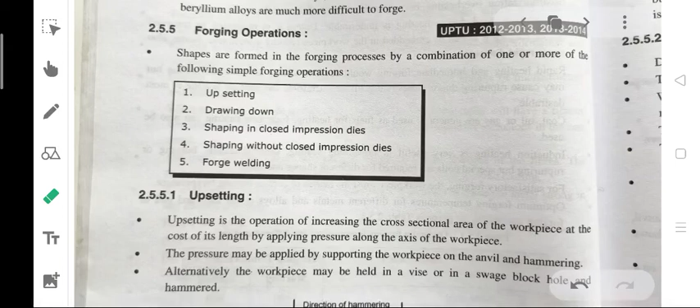In forging operations, there are five forging operations. First is upsetting, second is drawing down, third is shaping in closed impression die, fourth is shaping without closed impression die, and fifth is forge welding. These are the shapes formed by the forging process, by combination of one or more of these simple forging operations.

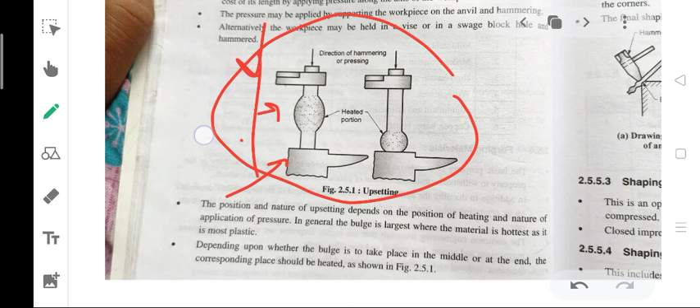Here you can see how the shape of the heated portion is changing. So upsetting operation means: upsetting is the operation of increasing the cross-sectional area of the workpiece at the cost of its length by applying pressure along the axis of the workpiece.

Second, the pressure may be applied by supporting the workpiece on the anvil and hammering. We saw in the diagram the anvil position and hammering position. And third, alternatively the workpiece may be held in a vise or in a swage block hole and hammered. This is also usable.

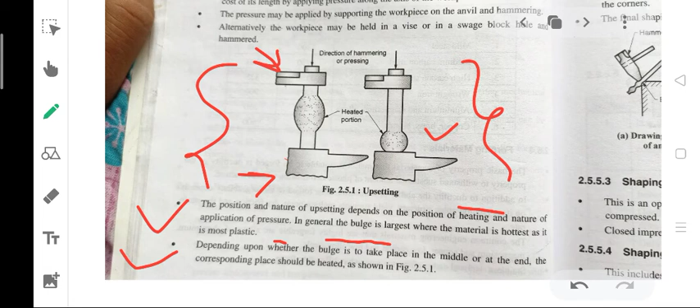In general the bulge is largest where the material is hottest, as it is most plastic by nature, and depending upon whether the bulge is to take place in the middle or at the end, the corresponding place should be heated. As we see in the diagram, the heated portion is here, and its formation is occurring accordingly.

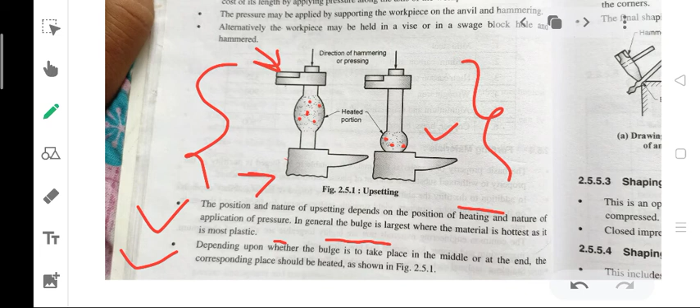Further, it depends upon whether the bulge is to take place in the middle or at the end; the corresponding place should be heated. If a short bar is heated all over and a heavy pressure or blow is applied, it will be upset or bulged over its whole length, and when the pressure or blow applied is light, only the local effect is seen.

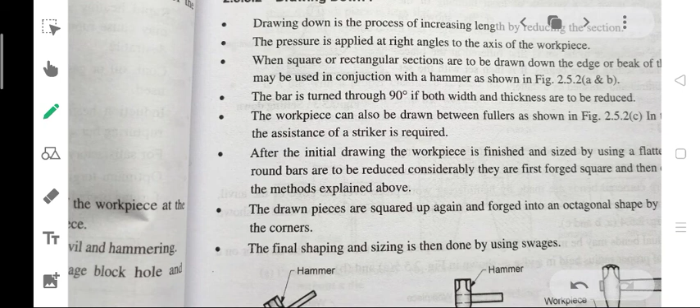Now let's do the next operation, that is drawing down. In drawing down operation, this is the diagram of the position. There, the first diagram is drawing on the edge of anvil. This one is the edge of anvil. This one is drawing on the beak of anvil. Here you can see this is the symbol of plus, that is the beak of anvil.

And this one is the diagram for drawing between the fullers. So this one is the fuller. So what is the drawing operation? Drawing down is the process of increasing the length by reducing the section, and the pressure is applied at right angles to the axis of the workpiece.

Third, when square or rectangular sections are to be drawn down, the edge or beak of the anvil may be used in conjunction with a hammer, as we can see the hammer position here. Also the bar is turned through 90 degrees if both width and thickness are to be reduced. The workpiece can also be drawn between fullers; in this diagram we have seen the fullers, and sized by using a flatter.

Fuller and flatter का यूज़ करते हैं. And when the round bars are to be reduced considerably, they are first forged square and then drawn by the methods explained above, and the drawn pieces are squared up again and forged into an octagonal shape by flattening the corners, and the final shaping and sizing is then done by using swages.

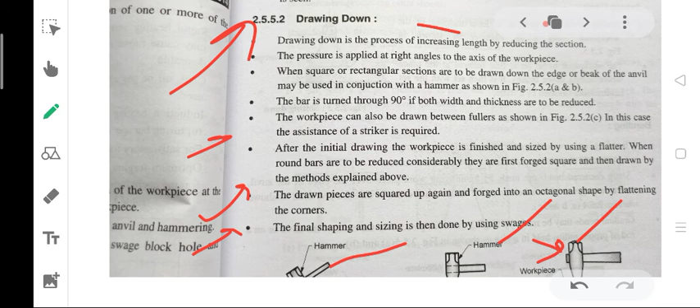ये आपको रिमेंबर होना चाहिए कि फाइनल शेपिंग एंड साइजिंग डन बाय अलग अलग तरीकों से, जो आप यहाँ बीक की पोजीशन में देख सकते हैं. ये हमारे सारे ड्राइंग ऑपरेशन हैं. ड्राइंग फर्स्ट कंडीशन में हम एज ऑफ द एनविल पर कर रहे हैं, सेकेंड ड्राइंग ऑन अ बीक ऑफ एनविल पर।

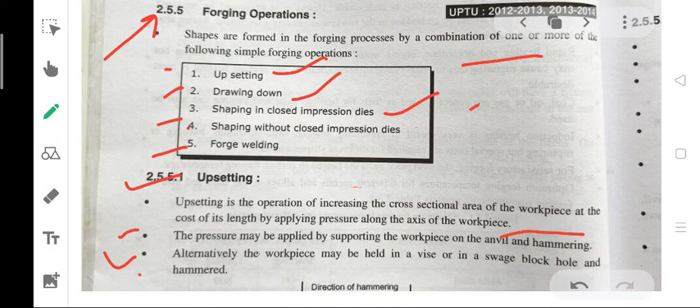एंड थर्ड वन इज द ड्राइंग बिटवीन फुलर्स के थ्रू. नेक्स्ट ऑपरेशन जो हमने नाम पढ़े थे, वो हैं अपसेटिंग, ड्राइंग डाउन, शेपिंग इन अ क्लोज इंप्रेशन डाई, शेपिंग विदाउट क्लोज इंप्रेशन डाई. तो जब हम शेपिंग इन अ क्लोज इंप्रेशन डाई की तरफ प्रोग्रेसिव होते हैं, यहाँ पे आप देखेंगे क्लोज इंप्रेशन डाई एंड विदाउट क्लोज इंप्रेशन डाई.

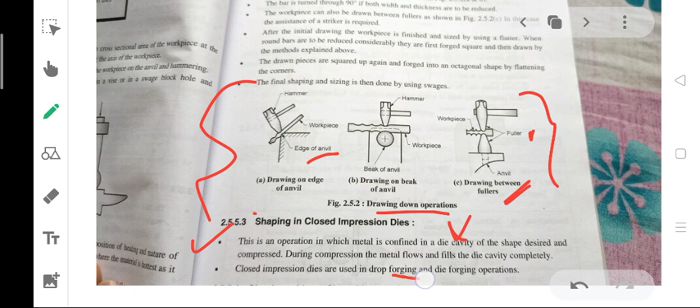दिस इज एन ऑपरेशन इन विच मेटल इज कन्फाइंड इन अ डाई कैविटी. यहाँ पर डाई वर्ड यूज़ हो रहा है, यानि डाई का यूटिलाइजेशन है, एंड इन अ डाई कैविटी ऑफ द शेप डिजायर्ड एंड कंप्रेस्ड. During compression the metal flows and fills the die cavity completely. Closed impression die are used in drop forging and die forging operation, तो closed impression die का यूज़ करते हैं drop forging and die forging operations में.

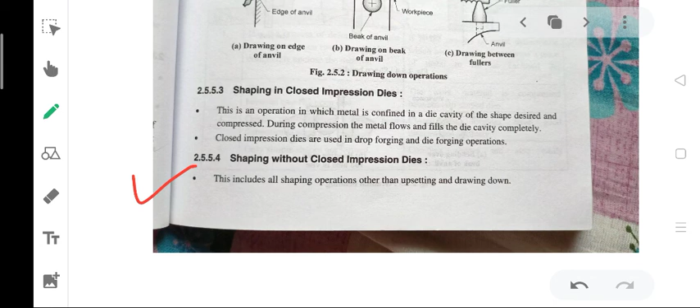And further there is shaping without closed impression die. This includes all the shaping operations other than upsetting and drawing down. The operations included in this category are setting down, bending, flattening, piercing and so on.

तो यहाँ पर आप पहले देखेंगे सेटिंग डाउन ऑपरेशन. इन दिस सेटिंग डाउन ऑपरेशन, दिस इज द अरेंजमेंट - यहाँ पर हैमर ब्लो, हैमर पोजीशन, सेट हैमर, एंड देयर आवर कंडीशन. सेटिंग डाउन इज द प्रोसेस ऑफ लोकल थिनिंग ऑफ द वर्कपीस using a set hammer as shown in figure, and the workpiece is to be set first with fuller at the place where the setting down begins. It is then set with the set hammer and finished by flatter.

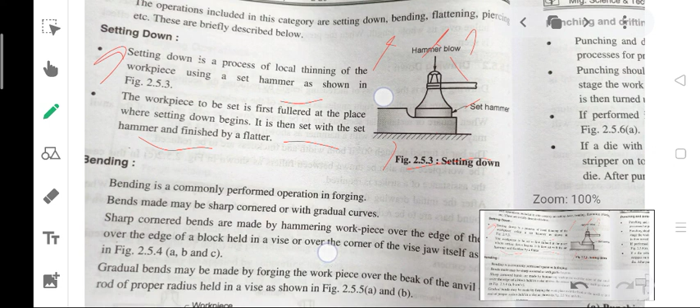इसको हम लोग अभी देखेंगे bending operation. Bending is a very commonly performed operation in forging, and bends made may be sharp corner या with gradual curves, and also sharp corner bends are made by hammering workpiece over the edge of the anvil, over the edge of the block held in vice, or over the corner of the vice jaw itself.

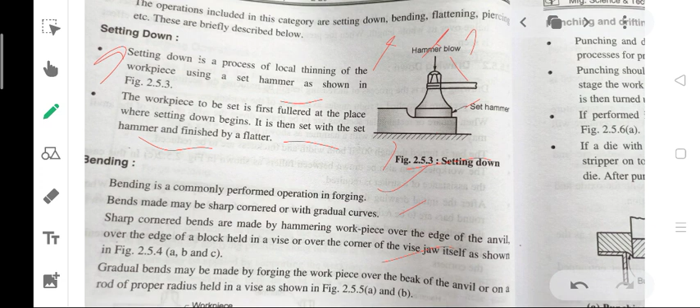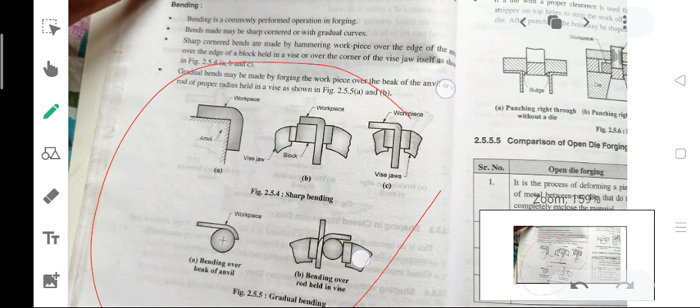And also gradual bends may be made, this one is the diagram for bending operation. Gradual bends may be made by forging the workpiece over the beak of the anvil or the rod of the proper radius held in the vise. So this one is the anvil and this one is the work position. This one is the workpiece, this one is the block, this one is the vise jaw, this one is the sharp bending, and यहाँ पर this one is the vise jaws and this one is the workpiece.

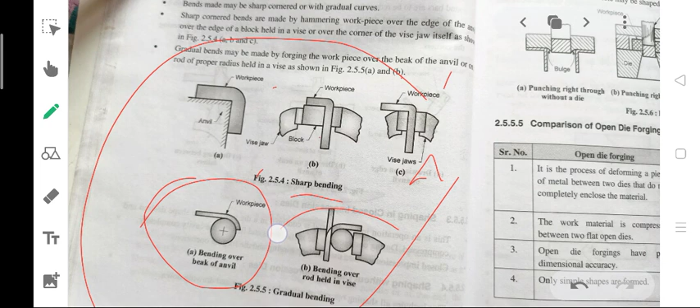जब बात कर रहे हैं यहाँ पे ग्रेजुअल बेंडिंग बैंड्स में, तो यहाँ पे आप देख सकते हैं दिस वन इज द बेंडिंग ओवर द बीक ऑफ एनविल, बेंडिंग ओवर द रॉड हेल्ड इन वाइस.

देन पंचिंग एंड ड्रिफ्टिंग. In punching and drifting, the diagram shows punching right through without die, punching right through, and use of punching for shaping. पंचिंग एंड ड्रिफ्टिंग का यूज़ करते हैं फॉर प्रोड्यूसिंग एंड फिनिशिंग होल्स के लिए, as a preparatory process for producing other shapes.

Punching should be done in two stages if performed without the use of die. In the first stage the workpiece is kept flat on the anvil and the hole is pierced halfway through. The job is then turned upside down and pierced completely. यहाँ पे डायग्राम हम देख सकते हैं.

This is the diagram, and if performed in one stage as a bulge will be produced on the other side as shown in figure. Then if a die with proper clearance is used, the hole can be punched right through, and the stripper on the top helps to strip the work off the punch and also align the punch with the die. तो डाई एंड पंच यहाँ पे असेंबली देख सकते हैं.